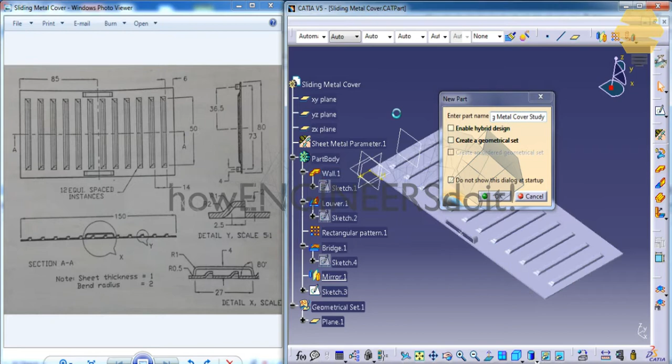The first thing you have to do before starting anything in the sheet metal workbench is to set the sheet metal parameters. Click on the sheet metal parameters and make sure that you have the thickness set as 1 mm and the bend radius set as 2 mm, as you can see in the drawing.

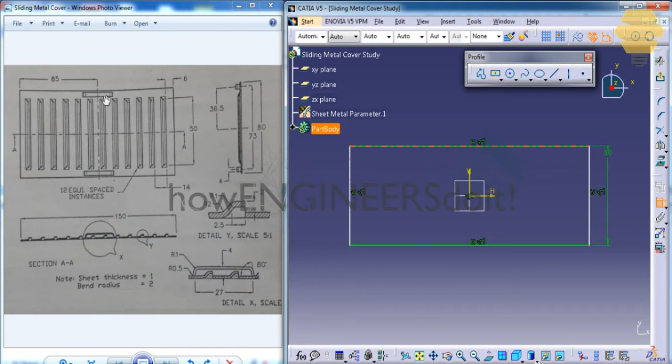Now, click on the sketcher and click on XY plane and start sketching. You could use the centered rectangle in order to make our work easier. Click on the center and drag it outwards, and now you can use the dimensioning and dimension this with respect to the drawing. So as you can see, the side view of this base wall is right here, so the vertical length is 80 mm and the horizontal is 85 plus 85, so it's 170.

Now you could exit the sketch and apply our first feature. Click on the wall and click on OK. That creates our first element. Now we need to create a louver stamp on this and then do a transformation on that.

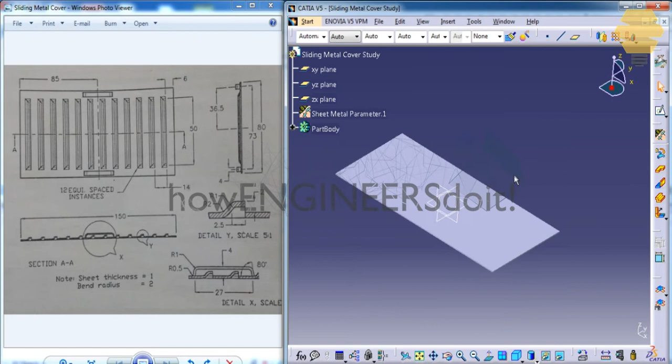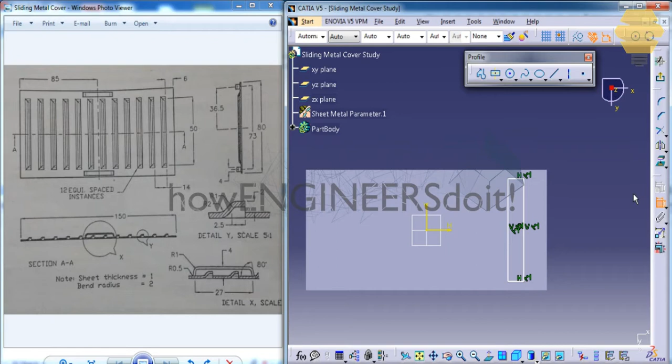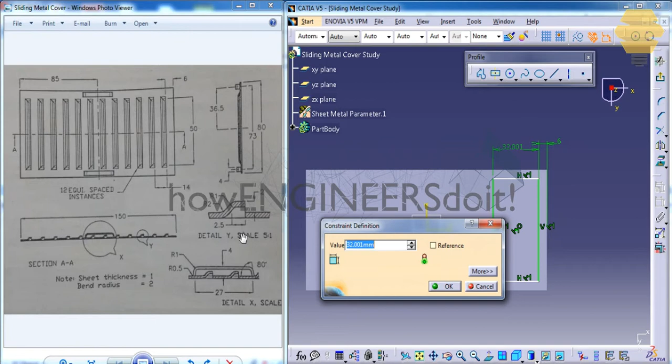To do that, click on the sketcher and click on the bottom, and then select the centered rectangle and click on the X line, drag it outwards and click once. Now use the dimensioning and dimension this according to whatever you see here. So as you can see, this is at a distance of 6 mm, and this particular thickness here, as you can see in the detailed drawing, is 2.5 mm, and the height or the vertical length is 50 mm.

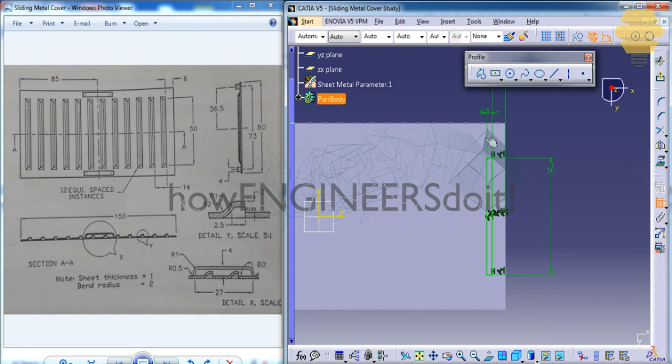Now as we have applied the centered rectangle, the rectangle is located at equal distance from this edge and this edge as well. Now exit the sketch and go for insert, stamping, louver stamp. As we had already selected the sketch while going for the louver stamp, the profile is getting selected automatically.

Now you need to select the opening line. What's an opening line? Opening line is the line with respect to which the louver stamp is being created or opened. So once we click on the preview, you can see that the louver stamp is being created, and this is how the louver stamp looks in the close view.

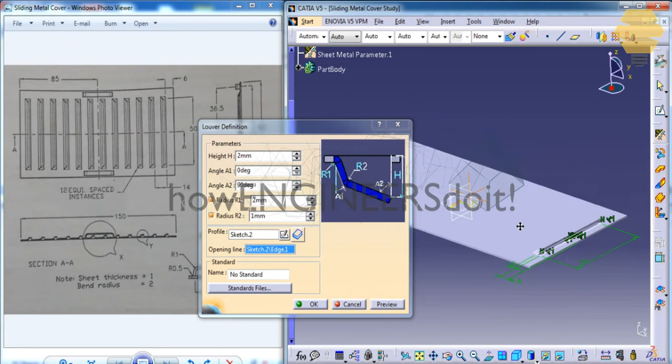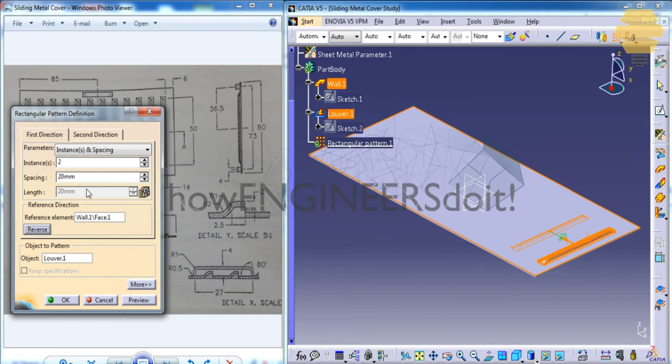Now instead of creating these kinds of stamps individually, we have an option called the rectangular pattern. So just go for rectangular pattern, click on the louver stamp, click on the reference element, click on this face, go for reverse direction and specify the instances. As you can see, it's 12 equispaced instances, so you could specify 12 and the spacing is 14. Click on preview and that completes the louver stamp transformation. Click on OK.

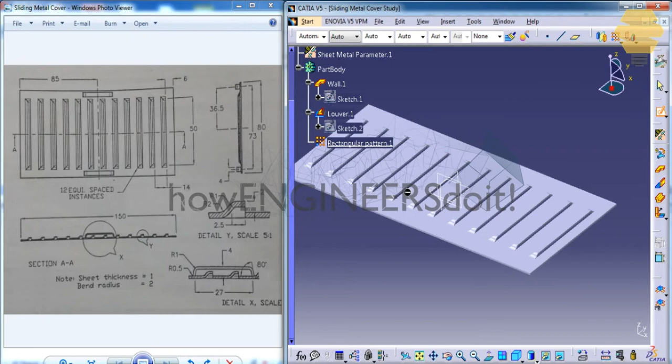Now we have to do our last step, that is to create the handles. To create the handles, let's go ahead and click on the sketch, and again sketch on the bottom face, create a point, let the point be created at the vertical line, so you don't even have to do the symmetry. That's the reason why I asked you to start the sketch using a centered rectangle.

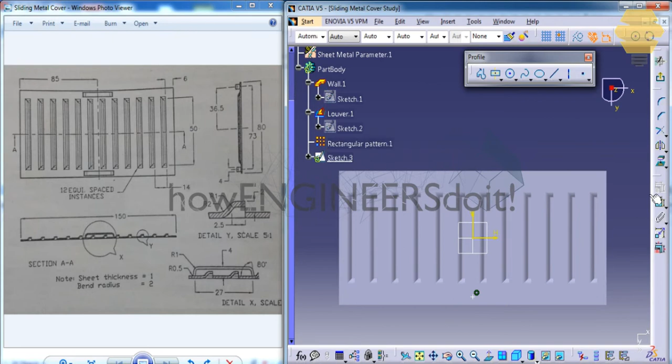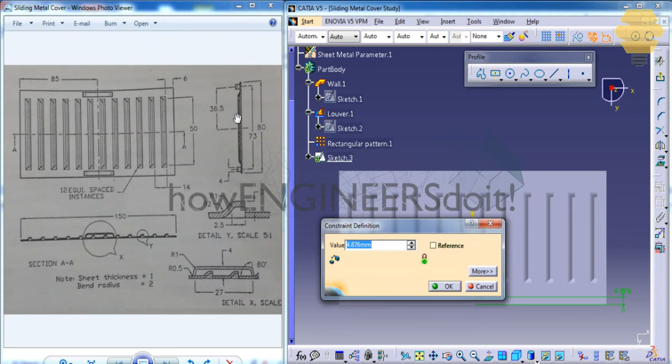Now we need to set the offset that the point creates with the edge, so go for the constraint and set this, and as you can see here, this is 36.5 and this is 80, so half of 80 is 40. 40 minus 36.5 is 3.5, so that's how we calculate that. And exit the sketch. Now we have to do something interesting here.

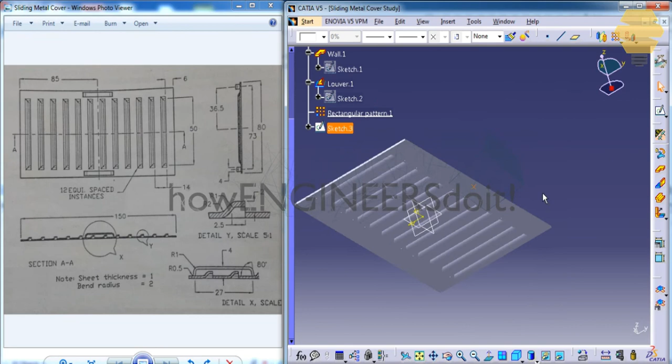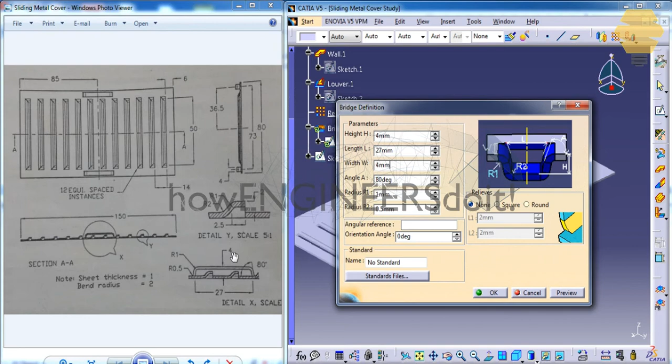In order to create a bridge stamp, select the point and select the bottom face, and then go for insert, stamping, bridge, and then you need to specify the values of the bridge stamp. So you can specify radius 1 as 1 and radius 2 as 0.5, and then the height is 4, length as 27, width is 4, click on preview. Alright, that's good. Now you can click on OK.

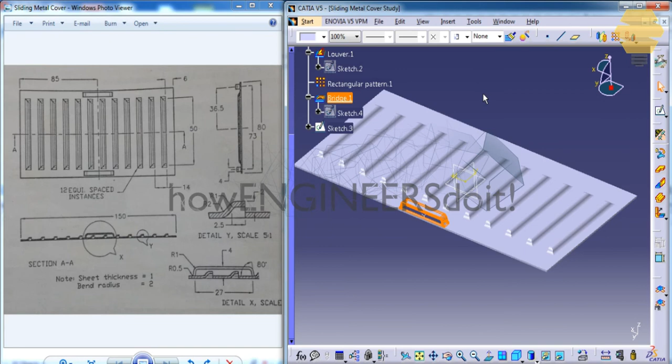Now finally, as we can see we need another handle there, so click on the bridge, go for the mirror option in the transformation toolbar and select the YZ plane, and then click on the preview, click on OK. So that completes our sliding metal cover body in the generative sheet metal workbench, and let's see what comes ahead.